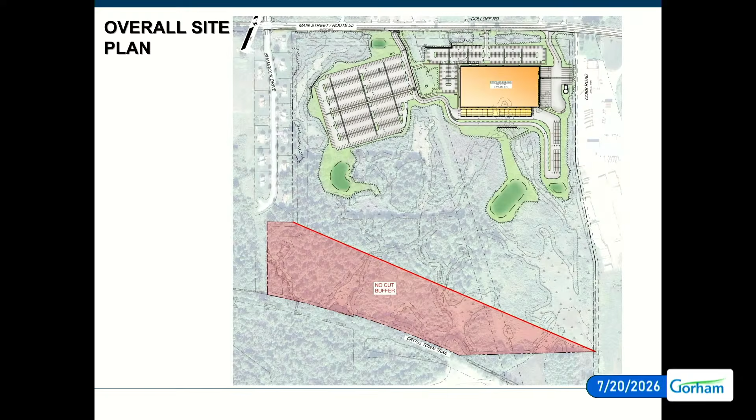This is the same plan, zoomed in a little closer, focused on the development. Brief recap: there are 3 driveways, one for each vehicle type. The one on the right is used by large tractor trailer trucks that come in and unload packages. This one in the middle is used by employees working inside the building. And the one on the west side is for delivery vehicles and the drivers that operate those vehicles.

Updates to the plan include a sidewalk along Main Street from the western driveway here. It's located along the southern side of Main Street, crosses at a crosswalk across Shamrock Drive, and then another crosswalk across Main Street to the existing sidewalk at Gateway Common. That's what was shown on the plans.

Carol kind of explained this to you, but staff is recommending that the sidewalk get extended, continuing on the south side of Main Street all the way down to Libby Avenue, where there's a signalized crossing. That would prevent the mid-block crosswalk. So if that's staff's recommendation and the board's desire, the applicant's not opposed to installing the sidewalk all the way down to Libby Avenue, and I think that's a condition of approval in your packet. So just wanted to make that clear that we're not opposed to that.

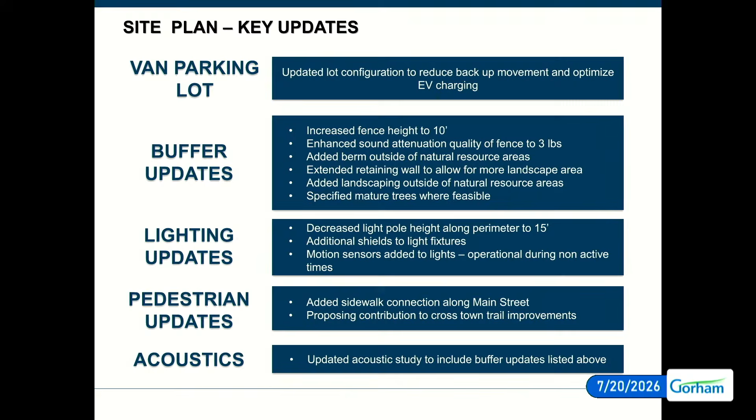Acoustical updates: this is just to basically state that the noise study has been updated and incorporates all the plan changes that have occurred since the last submission and the last time we were in front of the board.

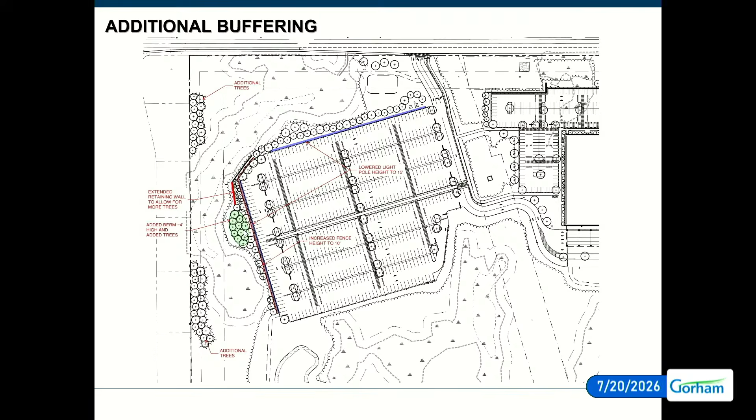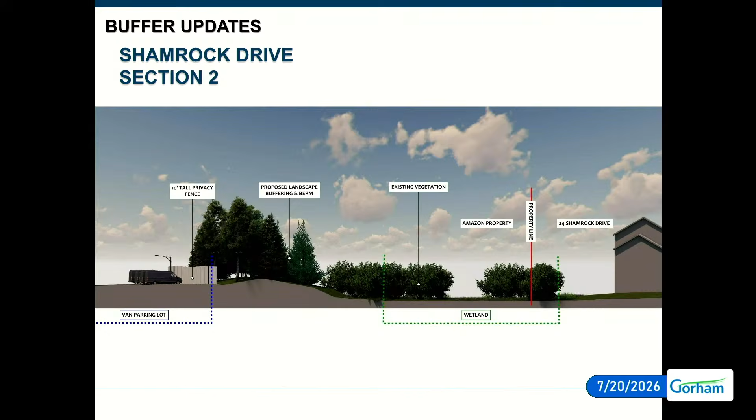This next section is at 24 Shamrock Drive, viewing the cross section through the berm. Starting on the left, we have the van parking lot, and you can see the 10-foot privacy fence. Then we get into the berm area, where the grade raises up before dropping back down. These are proposed plantings in that berm area. We've got the existing vegetation to remain in the wetlands, and then the house representation on the right side of the plan, trying to give you a perspective of the buffer through that section.

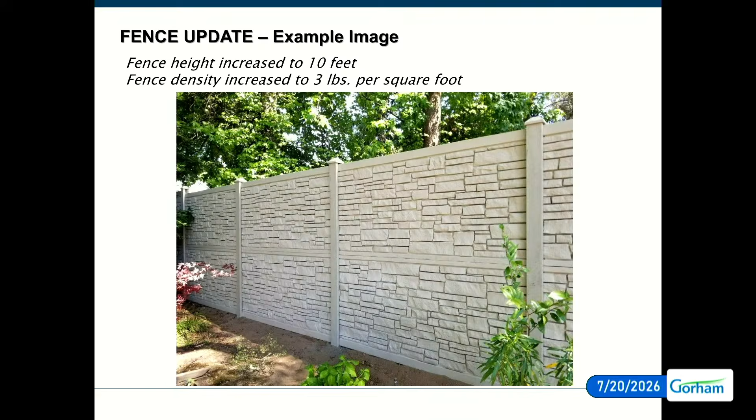This is an example image of the type of fence that is proposed. The fence height again is going to be 10 feet tall. This is a heavier weight fence than a typical vinyl fence, about double — it's 3 pounds per square foot instead of about 1.5 pounds per square foot. That extra weight provides that sound attenuation and reduces sound from one side to the other. There are different textures and colors this fence comes in, but this is an example of what it could look like.

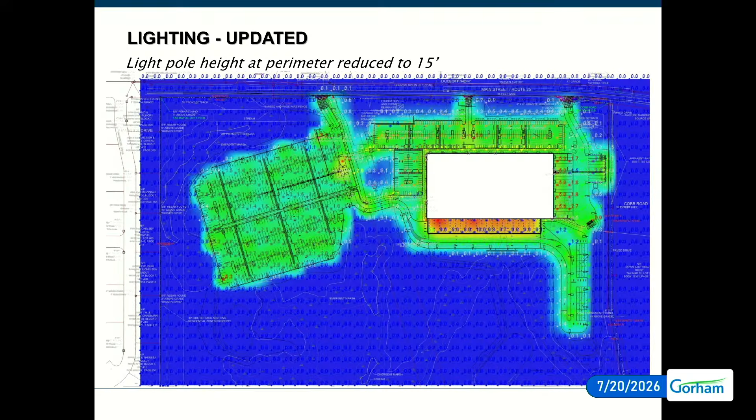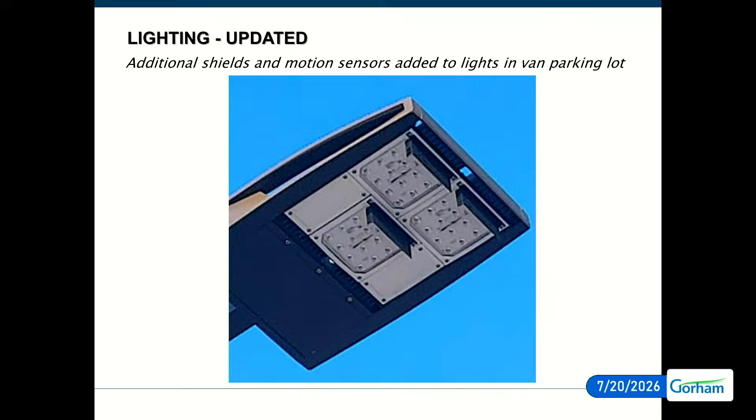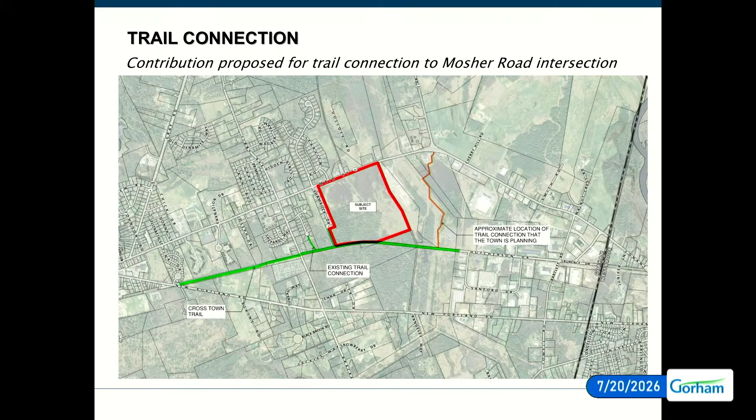So that contribution could be the seed money to start that, get design going, however it's best used. If the trail gets installed, this would have connections to the east and west of the site, from the Crosstown Trail up to Main Street, using existing trails to be connected and the existing road network. So that contribution is kind of in lieu of building a trail on the site, rather than going through an industrial park and industrial facility, trying to use some of the open space available to the east and west.

This plan shows the wetland resources across the site. Wetlands are shown in green, and there are some streams shown in blue. Proposed development is up to the north, and the proposed wetland impacts are shown in red. There's about 0.8 acres of wetland impact proposed as part of this project.

The next few slides you'll see a similar image and coloring, but we're going to use this as a baseline to compare to exhibits that were submitted showing possible relocation of some of the van parking lot, as well as a driveway connection to the south to Cyr Drive. So I wanted to use this as a baseline reference of what's proposed.

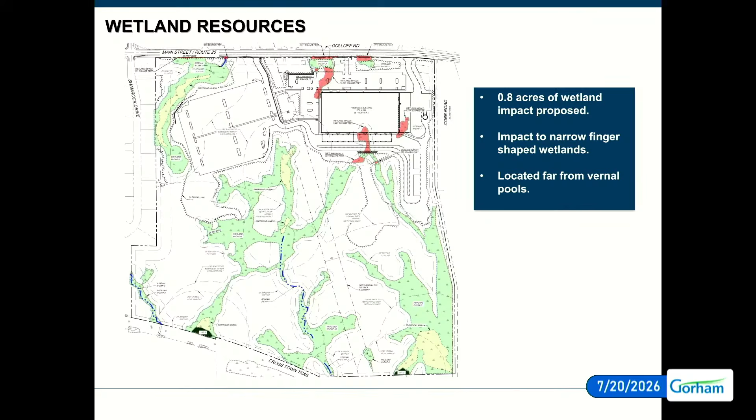This plan shows a portion of the parking spaces in the van parking lot, approximately 10% of them, relocated from the western side of the site to the eastern side. The van parking lot is highlighted in yellow or light orange, showing that approximately 50 to 60 parking spaces were moved from that lot to this location on the eastern side of the site. I want to highlight that this is not a proposed exhibit; this is a study we're conducting.

What that does is increase the buffer, the distance between the van parking lot and the western property line, by 50 feet, from 150 feet to 200 feet, but it does result in more wetland impacts. Because of those additional wetland impacts, we don't think this is an alternative that would be accepted by the DEP or the Army Corps.

This next exhibit relocates about 50% of the parking spaces in the van parking lot from the western side of the site to the eastern side. There are much more wetland impacts associated with that, over an acre of additional wetland impacts. The distance between the parking lot on the west and the western property line increases to 350 feet.

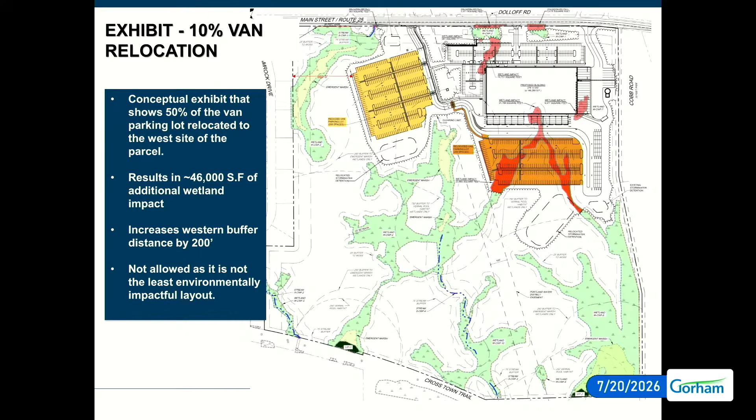This plan here is showing a conceptual driveway connection to Cyr Drive. There's basically one location on the southern portion of the site where the connection can be made due to existing property lines. This location is where the driveway wouldn't go onto abutting private property or lots. It would just cross a crosstown trail and then have access to Cyr Drive frontage.

This does result in some additional wetland impacts on the southern portion of the site, which is closer to the vernal pools and more sensitive resources. This path also directs more of the traffic closer to the western side of the site, closer to the residences.

We did look at options to get this road to the eastern side of the site. That would require crossing the Portland Water District easement again, and they're not in favor of that. We've limited the crossing from east side to west side to one location for vehicles, so altering the path of this driveway connection down to Cyr Drive would require a second one. I don't think the Portland Water District would be in favor of that. It would also either impact a stream, have a stream crossing, or result in more wetland impacts if we had that driveway connection to the eastern side of the site.

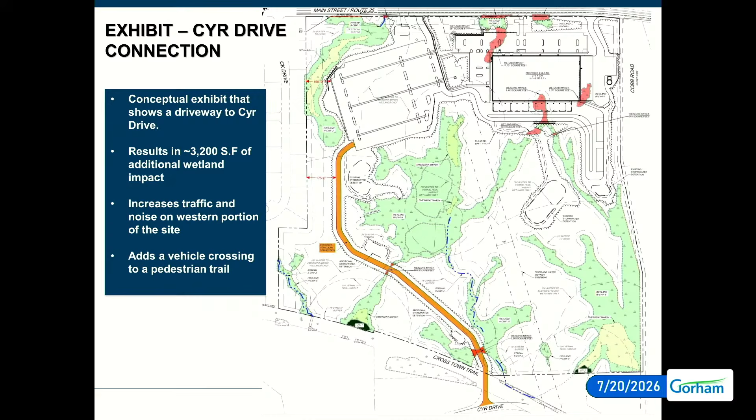This plan here, sorry, back up a little bit. We submitted a lot of operational data with the submission. In the cover letter that we provided, there was a breakdown, a narrative of how this facility operates. There was a time breakdown of when shifts were, when employees are arriving and departing, as well as two links, one to a video that explains, or it was a video of a similar facility, a last mile facility, of how that operates.

There's also a link to an article about a day in the life of one of the employees, a dispatcher for the delivery vans, of how their day operates. So you get to see some pictures inside of the facility, and it provides their hourly breakdown as well.

This slide here is trying to provide a brief overview of the operations and the schedule of which driveways are active, which sides of the site are active, and when shifts are coming and going. On the right side, this is the eastern entrance used by the trucks, large tractor trailers, line hauls. Most of those vehicles come in early morning hours between 4 a.m. and 7 a.m., but there are periodic deliveries outside that window.

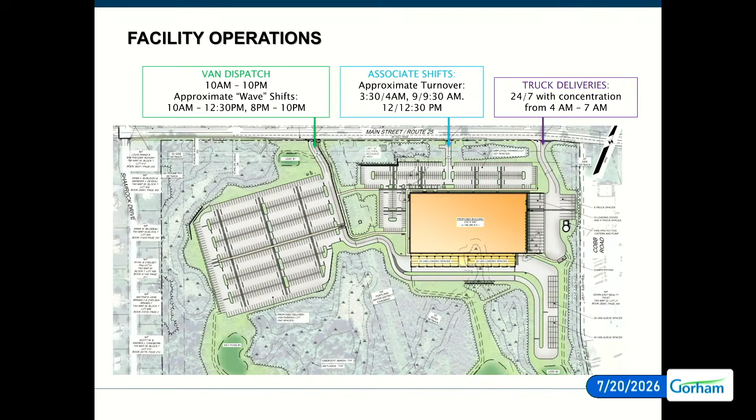So this is in the submitted material, but this is where all of that time breakdown, when people are arriving and departing, comes from. This table gets confusing if you're not used to looking at it, so that's why we tried to provide a more simple view of when are the shifts, when are people coming and going, from which window. I don't expect you to know this or really understand it, but this is where it comes from.

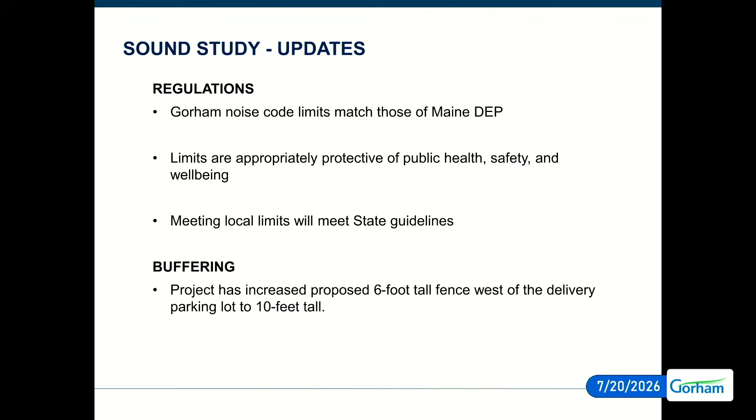And then some more information on the backup alarms. This was provided in the packet as well. Amazon's standard backup alarm is a smart broadband alarm. The broadband means that it produces what's referred to as a shush sound rather than a tonal beep sound.

The smart alarm piece refers to an ambient noise sensor on the vans that detects how much ambient noise there is. During quieter periods, that alarm doesn't need to be as loud as during louder times of the day. So if there are other vehicles around and commotion, the alarm will adjust as needed to meet the safety standards. But if you have one van coming in on a pretty quiet site, the backup alarm will be at a quieter level.

These are the previous exhibits representing the noise levels as they disperse across the site. These are the same kind of color renders as previously shown, but they've been updated to incorporate the fence and the current design. This one is modeling the HVAC equipment on top of the roof, and you can see sound receptors A through E on the west and northwest sides of the site. In the bottom left corner, those are the resultant noise levels as part of the study.

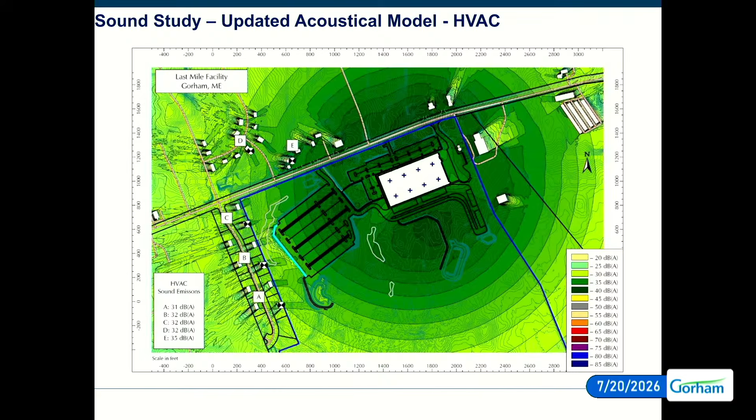So this one's for the mechanical equipment on the building. This one is representing the busiest time of the site, where vans are coming and going, employees are coming and going from the site. The number of vehicles modeled here has been updated to reflect and match the traffic report and those DOT trip generations.

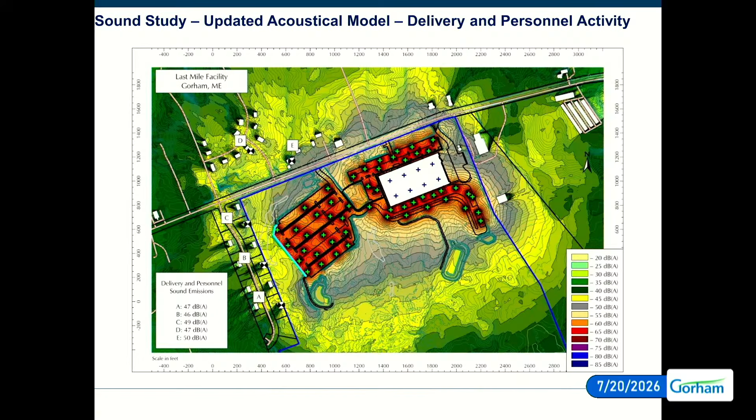Again, this one's for a truck in the truck yard. There are two locations for the truck, one towards the front, with the resultant sound receptors as it moves across the site. And then this is a truck in the southern portion of the site. So pretty similar to what was proposed previously, just updated to incorporate the current design and comply with ordinances and the DOT trip levels.

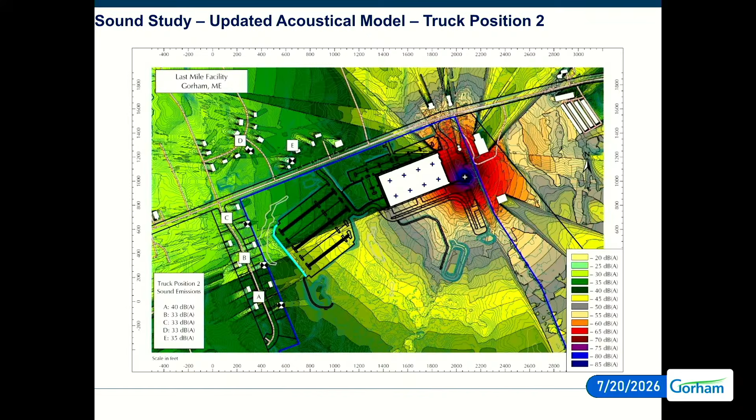A quick update on the permits. As Carol mentioned, we had the traffic scoping meeting with the Maine DOT. We are in the process of drafting the traffic study and anticipate submitting that back to the DOT by the end of the month. Maine DEP has been submitted for a while now. We've received some comments from DEP staff and we'll respond to those. So it's ongoing and moving in the right direction.

Federal permits, we've been in coordination with the Army Corps of Engineers. They were recently out at the site looking at the wetlands to determine if they're jurisdictional or not for the Army Corps. We do anticipate a provisional approval of the Army Corps permit here in the next few weeks.

And with that, that concludes the update, but we're definitely available for any questions that you may have. Thank you.

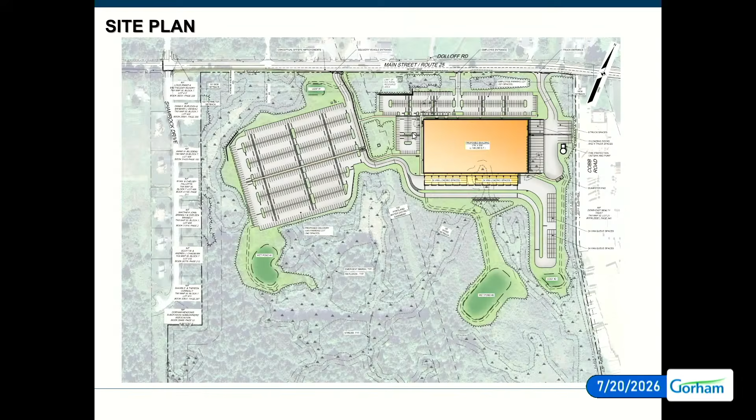You presented one option to relocate 10% roughly by moving over there behind. And then you presented 50%. Of course, I like the 50% because it provides a much bigger buffer to Shamrock Drive.

But I noticed we're kind of working with rectangular parking lots. Is there a way, when looking at that — let's think outside of the rectangle — to fit parking that doesn't conform to nice even sides, and design it so it may fit some of the areas that are less impacted by wetlands? Could you fit in a couple triangular lots? I know it's not ideal, but could that be done?

Because one of the things we hear throughout all of this is the proximity to Shamrock Drive is too close. You have presented some buffering, I appreciate that, and quite a bit of changes from the last time we spoke. But I'm still very interested in how we can move parking, even if it breaks it up into 3 pieces of lot. How can we move some of it over there? Or, let's go right to it — what about mitigating the wetlands to try to do that? It's done, I'm sure you've done it.

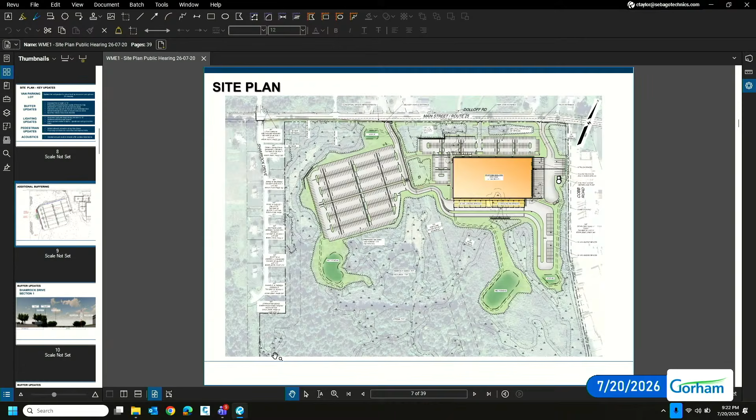But I would really like to see more work in that area, and see if we can open up — and I'm open to other ideas — the space between Shamrock Drive and the parking area. That's my number one concern.

Do you have a number 2 concern? No, I'll let you handle it. Mr. Chair? Please, Mr. Russell. Thank you, Frank.

A couple of things. Someone from the audience mentioned the buffering in terms of the existing scrub, and I made a note last night: the scrub versus the trees, what would be the more effective buffer? Obviously a lot depends on the nature of the scrub and the nature of the trees — is it going to be better or worse in the winter versus the summer, given the choice you make in terms of leaving the scrub or ripping it out and replacing it with trees? That's just something I was wondering, because I'm not an agricultural kind of guy that would know.

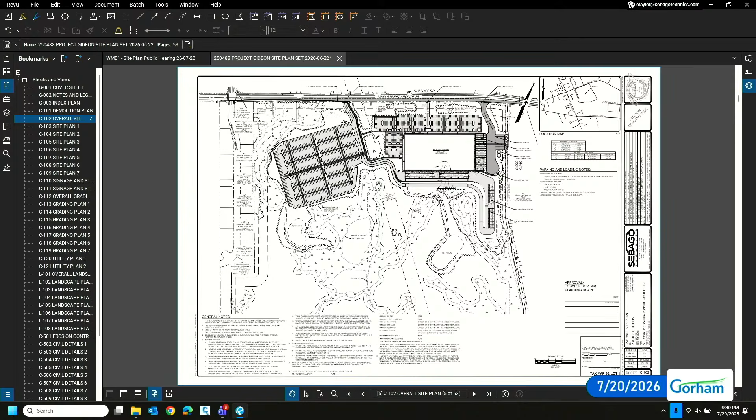Mr. Taylor, I got this crazy idea about this whole parking scheme. Sadly, we don't have a digital copy we can display on the board, so I'm looking at drawing C102. Okay, let's focus on that huge parking lot. Can we zoom in on that please? My question is, and I'm not trying to design it, but I guess I am.

By my count, we have 39 parking spots facing Shamrock Drive. Since we have 10 rows of parking, we could add 4 spots on each of those 10 lanes and there would be no headlights ever facing Shamrock Drive. You follow me? We would simply, in CAD terms, stretch those white end markers. So we'd be eliminating those 39 parking spots that are facing Shamrock Drive. Does that make sense? Yep.

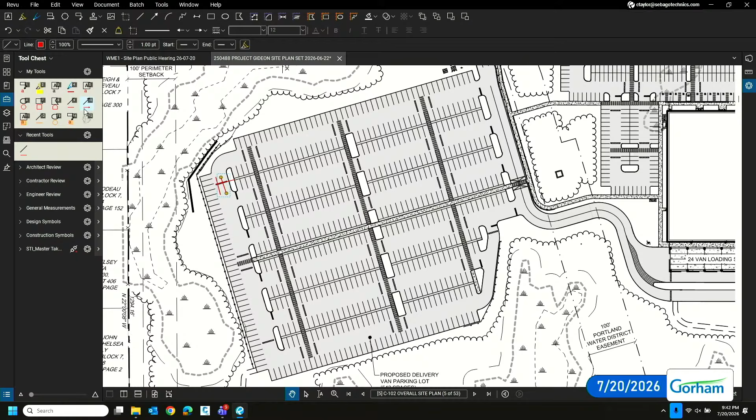And perhaps where those white end things are, there would still be enough room to be a slip lane. You follow me? I can sketch this for anyone in the public who wants it. We're trying to appease Shamrock Drive as much as humanly possible. You're talking about doing this, adding 4 parking spaces at the end of each row? Yeah, in AutoCAD terms, stretching that white thing toward Shamrock Drive and adding 4 more spots on all 10 rows. So we had 39 spots, we're going to have 40. We're net gaining 1.

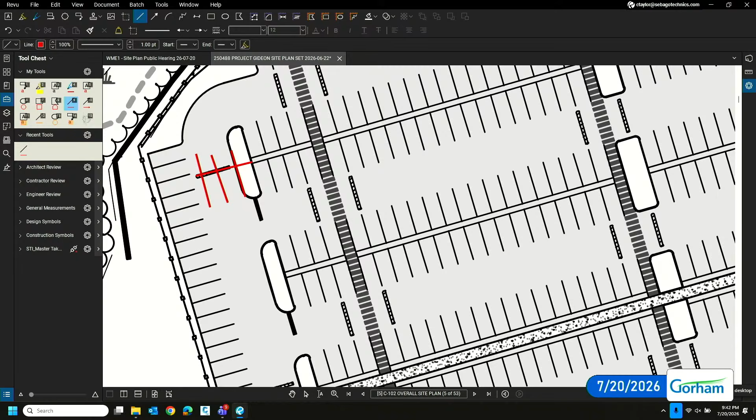That's an idea, something you have to investigate, something you can look at. Got it, yep. Okay, now if we go a little more towards the middle, between the parking lot and the building, a little bit more to your left please, zooming in, sliding left. Okay, right down there on the far right-hand side, we have this wild S-curve.

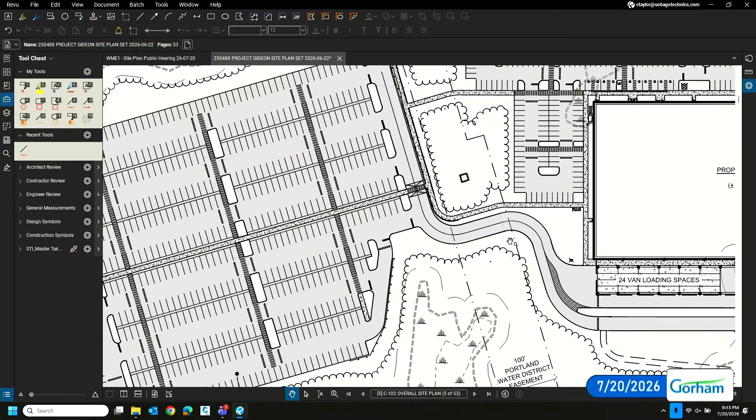Yeah, I don't want it. I wish we could take a tangent line from the radius on both sides and just make that a straight line, removing these curves in this road. I agree with you, but you'll have to bring it up with the Portland Water District. They wanted a perpendicular crossing of the easement so that the road crosses the water line at a 90-degree angle, not like a 45.

It's so difficult for traffic, right? I get it, that's a bigger authority than us, but very, very poor. I guess we can't, I don't know how you can get around that. I'm not a civil guy, look to Mr. Norton.

I'm looking at sheet C102. We have the big retention pond. Yes, correct, this one? Yes, correct. And when I go to sheets 118 and 119, we see portions of it. I guess sheet 119 shows it in its entirety. Yep, I didn't see a detail. Do we have a fence around this? There's not a fence proposed around it.

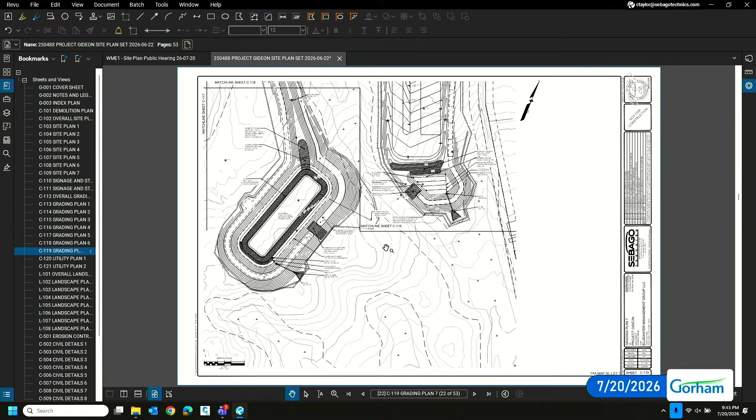Okay, I'm good with that. We're good with that. I mean, I just think of something that could be safer, I guess. That's all I have. Thank you for your time. Anyone else, please? It's 9:45. Please, yes, Mr. Frank.

Yes, following up actually on your comment, Jim, as well as Mr. Vercelli's about the three, what he called the dead ends, and yeah, it does look that way. What you said about, what I was going to suggest is eliminate that S-curve thing, but then we're crossing the Portland water line at an angle. And then my other thing was maybe we could connect the truck loading lot with the van loading lot near where the dumpster pad is. Again, I'm on 102, C102, sorry.

And we could at least make a loop, if you will, from the semi-trailer truck entrance and the van entrance. Now with the employee entrance, the one in the middle, yeah, that looks to be like a dead end. Because if an ambulance can get in, I guess that's probably the primary concern. Again, this is the C102, just lots going on there. Thank you, Mr. Frank. Anyone?